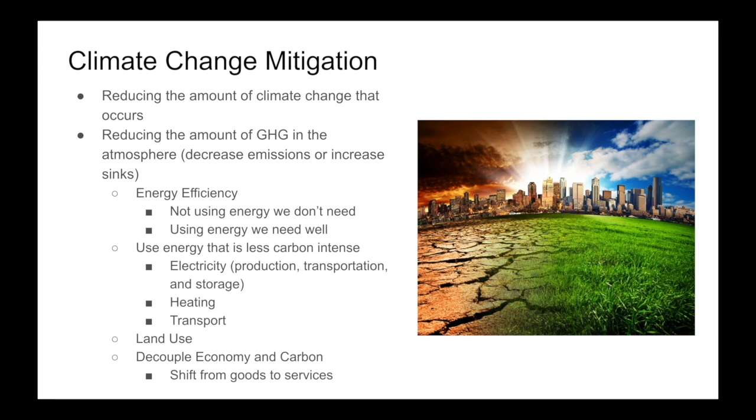We can break this down into a couple of different categories. We can look at strategies that increase energy efficiency, so not using energy we don't need, and using the energy we do need to use really well. We can also look at strategies that decarbonize energy production - electricity production, transportation, storage, how we heat our buildings, and how we move around. We can also look at land use strategies and other ideas for decoupling the economy and carbon.

Energy conservation is any behavior that results in the use of less energy. This is the turning off the light strategy. When I turn off the lights when I leave the room, less energy is used and therefore less carbon enters the atmosphere. The most efficient kilowatt hour is the kilowatt hour not used. So our most efficient energy that we can use is energy we don't use.

Drive your car less distance. Turn down the thermostat in winter, turn it up in summer. Some of these actions, such as changing your light bulb, do not have a big impact on day-to-day life. Others, like driving less or turning down the thermostat, do. People do not like being asked to do things that they perceive as reducing the quality of their life.

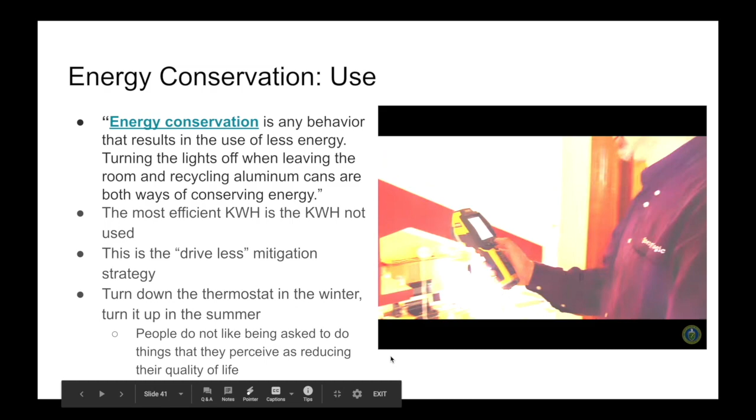In any season, a leaky home costs money. How do you stop it? It starts with a comprehensive home energy checkup - a series of tests and inspections to find out where your house could be more efficient. The end goal is to save energy, save money, and make your house more comfortable.

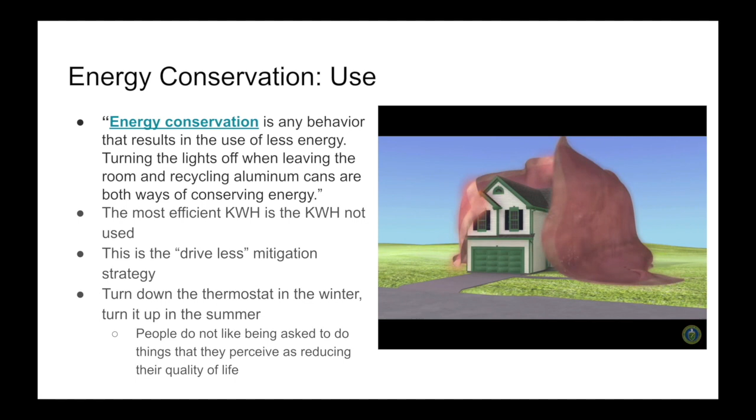Installing energy-efficient lighting and appliances will help. So will creating a sealed barrier around your house, kind of like putting a blanket around the outside, minimizing the leaks. Upgrading your home to save energy can put anywhere from 5 to 30% of your energy bill back in your pocket.

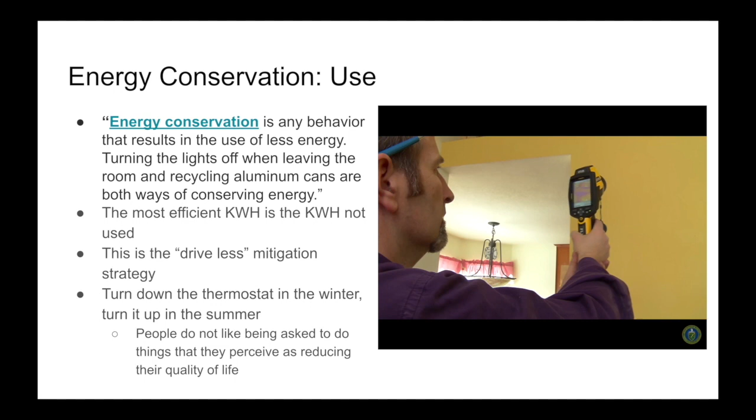To get a thorough home energy checkup, you'll need some help from a professional. Look for a home energy technician called an auditor in your area. In this cold weather evaluation, the auditor starts on the outside, looking for problems around walls, joints, and under the eaves. If there's not a tight fit, you're losing energy and money.

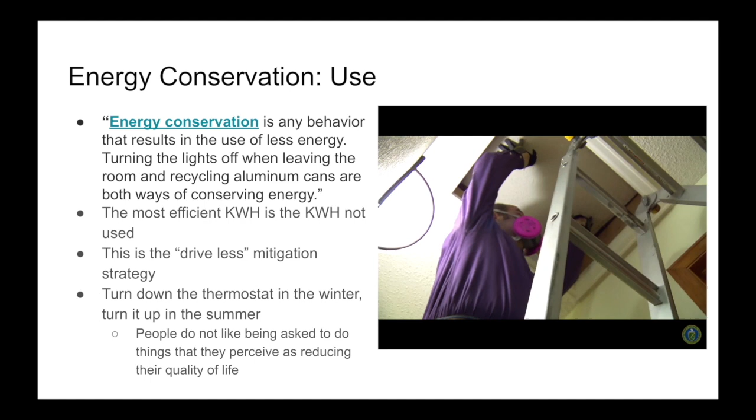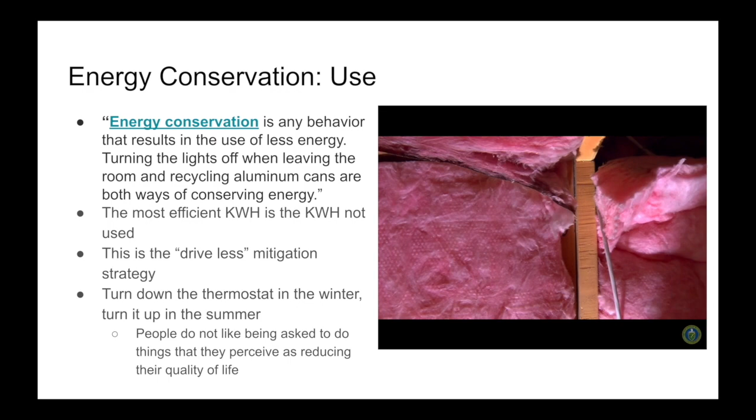Next, the technician might head up to your attic to check for leaks on the top of your home barrier. That trap door could be a culprit, letting cold air pass into the house. A big part of the checkup is determining how well the insulation insulates. Insulation should be correctly installed in between all areas of the house frame - it needs to be evenly applied and not just jammed into spaces. And of course, if the insulation has fallen down, it's not working.

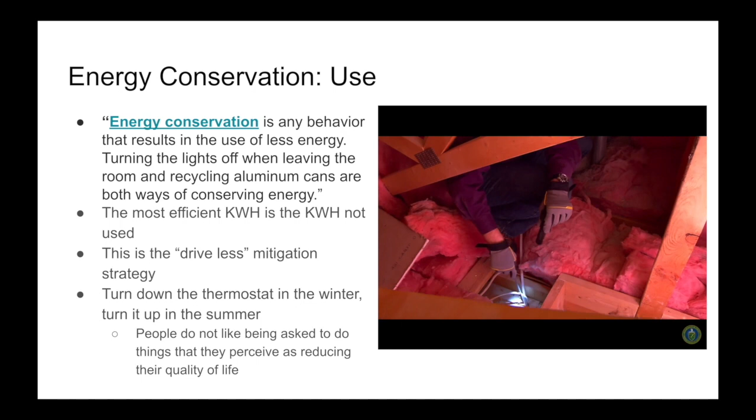Your energy auditor will inspect the holes where electrical lines pass through. If they're not sealed, they're leaking.

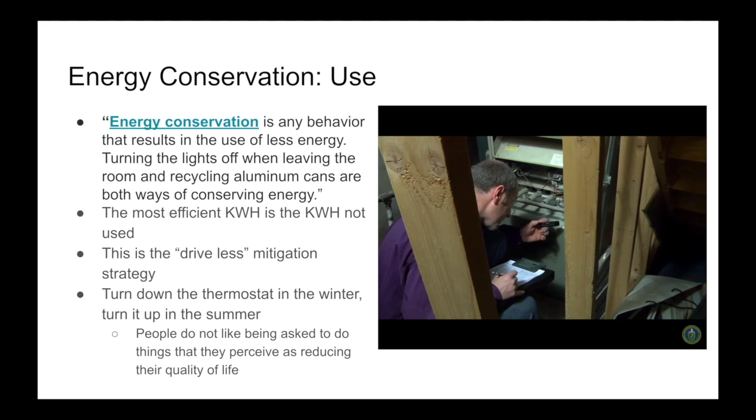Then it's down to the basement. Your furnace and water heater could be wasting energy. The auditor will check to see how energy efficient the furnace is. Furnaces generally lose efficiency as they get older, and it could cost you more to keep yours running than to replace it with a new one. Maybe all you need is a new filter - some people haven't changed their filter for months, even years.

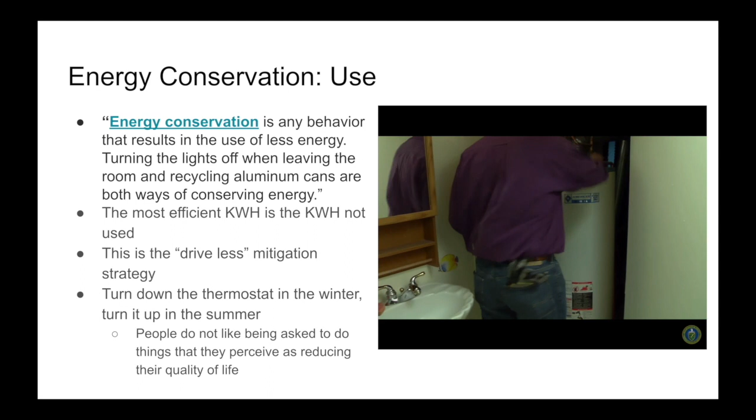That gunk clogging the filter means your furnace has to work harder to heat your home. If the water heater is several years old, it may not be efficient. And if it isn't insulated, it's also losing energy.

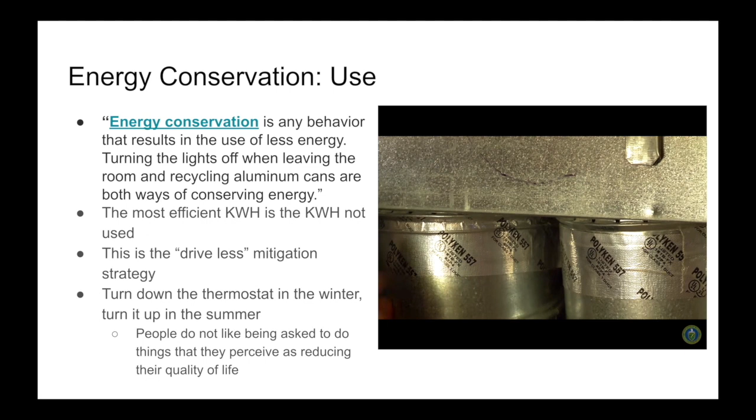Now it's on to the ductwork. The technician will inspect connections to make sure they make a tight fit. They have to be sealed to keep the warm air going where it's supposed to go. If the screwdriver can go in the hole, it means one thing for sure: money is going out.

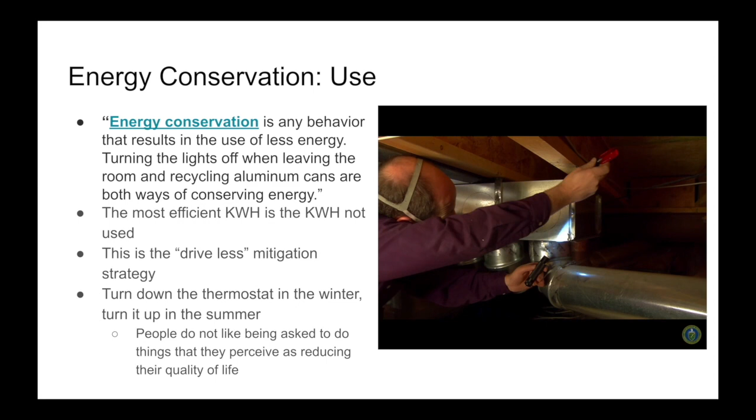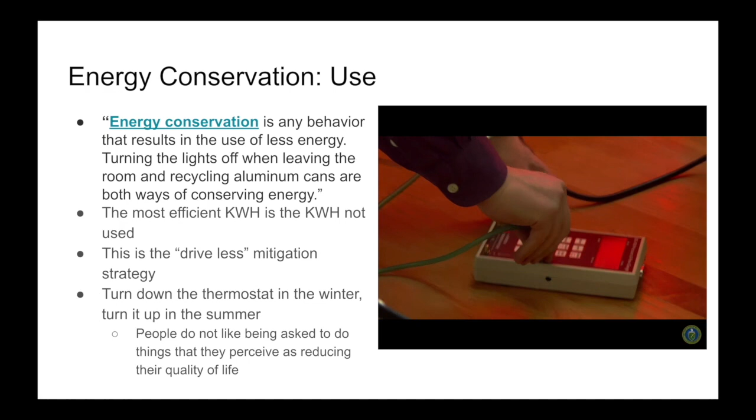Now for the blower door test. The energy auditor will close all the windows and doors and anything else that lets outside air in. This special fan will depressurize the home. The idea is to suck air out of the house, allowing outside air to rush into the home through all those openings you didn't know about.

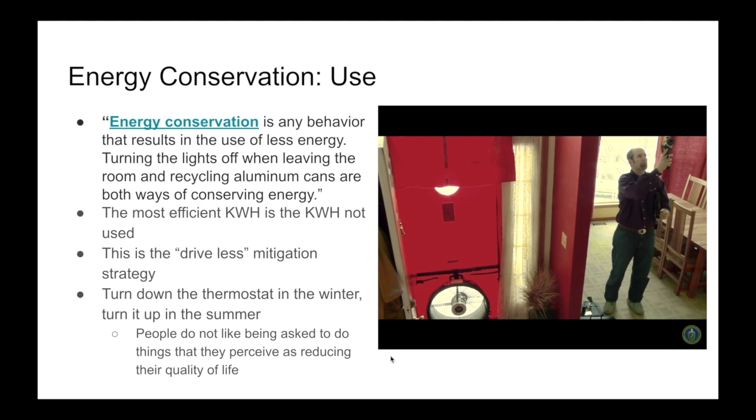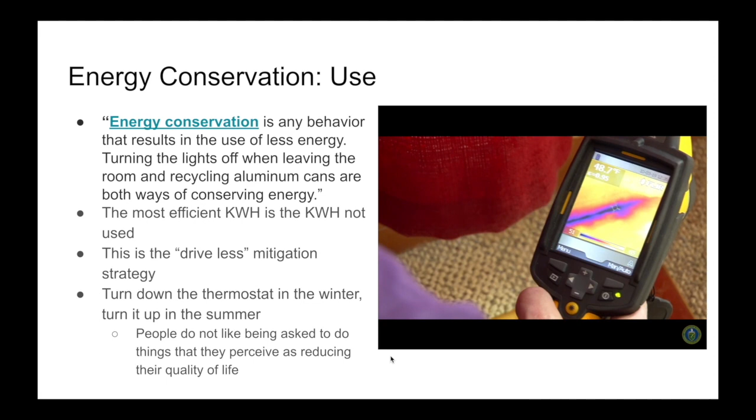With the windows and doors closed and the fan running, leaks are easy to spot with an infrared camera. In winter, the auditor will scan the interior of the home looking for cold air rushing in. The darker the color, the worse it is. These black spots mean one big air leak. It's an eye-opening experience. For this house, the recessed lighting fixtures are big problems.

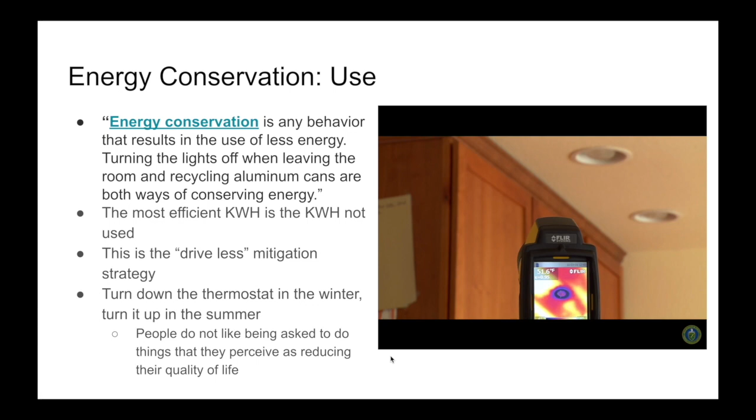The auditor will also take a look at the kinds of light bulbs in those fixtures. If they're incandescents, they're using a lot of energy. Warm, compact fluorescents are an energy-saving alternative.

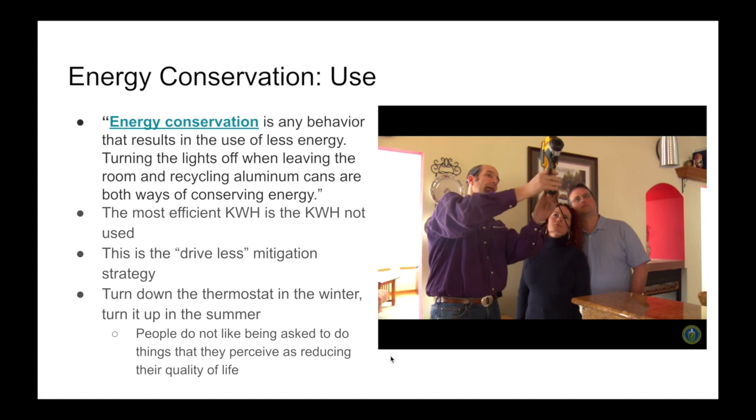So the home energy assessment reveals ways that energy escapes your home, costing you money. The good news is you'll have a comprehensive home energy report showing which efficiency upgrades are right for you and where to stop those pesky leaks.

So that's an example of a conservation strategy of using less energy that actually improves the quality of life. When you do not have cold air coming through your windows in the winter, you are more comfortable, you save money, and you use less carbon.

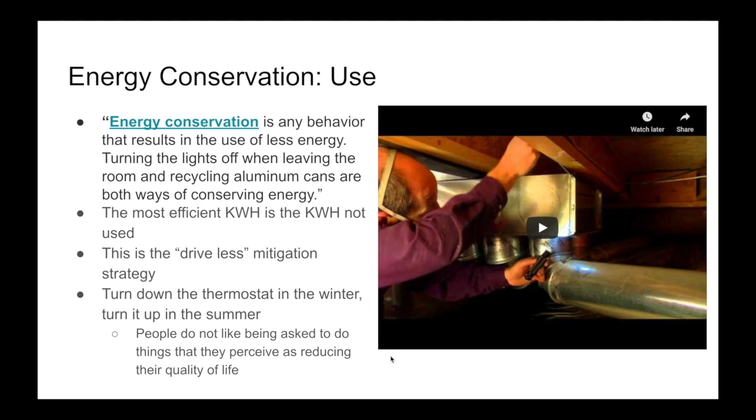In the 1970s, the United States had an energy crisis. We were unable to produce the energy that we needed, and OPEC was not supplying us with the oil that we were demanding. A number of steps were taken, one of which was President Carter instituting a thermostat control program. In the program, he stated that thermostats should not be set above 65 degrees in winter or below 78 degrees in the summer. This program saved 300,000 barrels of fuel daily.

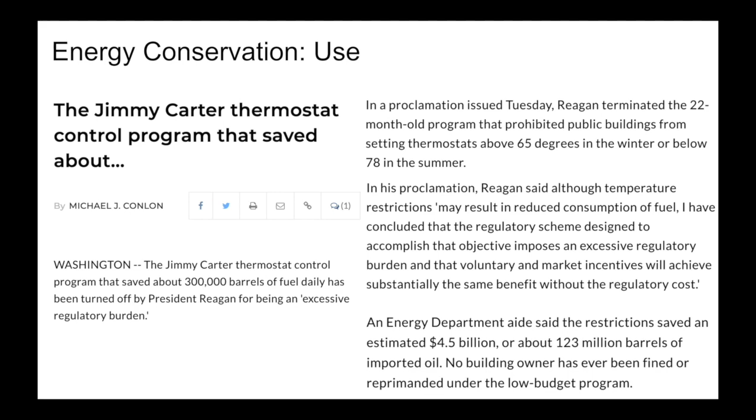However, President Reagan abolished the plan because it was an excessive regulatory burden that was deeply unpopular. In the winter, put on a sweater.

In the early 1970s, also in response to the energy crisis, President Nixon set highway speeds at 55 miles an hour across the country. Of course, speed limits are set at the state and local level. However, by tying federal highway funds to the plan, President Nixon was effectively able to set a national speed limit. The 55-mile-an-hour national speed limit was rescinded by President Clinton in the mid-1990s.

Again, a strategy that was put in place to save energy, albeit not for climate change, was abandoned because it was unpopular with the people.

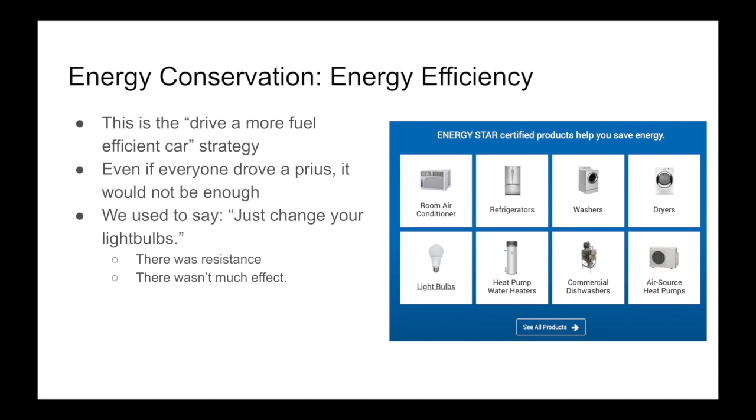While energy conservation is vitally important, it is not enough. Even if everyone drove a Prius, we would not be able to get our carbon emissions low enough. People used to say, just change your light bulbs, that'll fix the problem. And then there wasn't much of an effect. Very few people use incandescent light bulbs today. We have more efficient LED bulbs that better match natural sunlight, but even with that, we did not reduce our carbon emissions enough. Energy conservation alone is not going to do it.

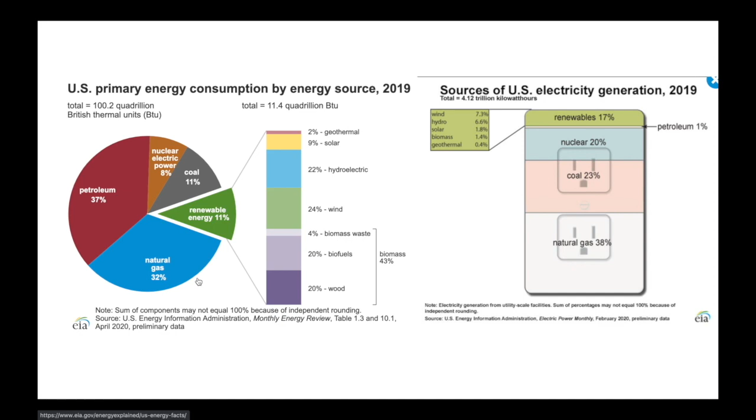I do for a minute want to talk about coal. The argument for using coal is we've used it in the past, and the infrastructure already exists. However, it is the dirtiest source of energy from a CO2 perspective, from a mercury perspective, and an aerosols perspective. It kills workers, and it kills people in the general population.

It contaminates drinking water, it destroys mountains through strip mining, and it's expensive both directly and indirectly through health costs. The big switch we've seen recently from coal to natural gas had a huge impact on the amount of CO2 we're putting into the atmosphere. It's also cleaner and cheaper. The downfall of coal is mostly the result of economic processes, not regulatory burden.

Natural gas, which we oftentimes talk about as being a bridge fuel because it is cleaner than coal, it produces less CO2 than coal. It is still a non-renewable resource, it is still a fossil fuel, it still emits, and it does have some problems such as causing earthquakes and groundwater contamination when mined through hydraulic fracturing.

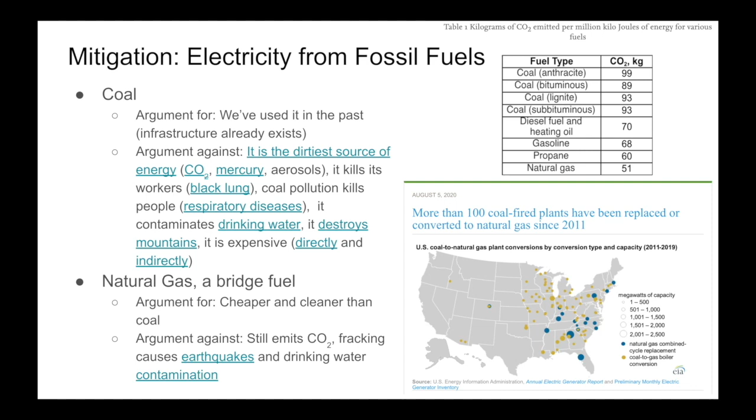The last non-renewable we are going to talk about is nuclear. Nuclear has a lot of arguments for it. It's a proven technology that produces baseload power without emitting carbon.

And when we talk about baseload power, what we're talking about is the amount of electricity that we are constantly going to use. So the amount of electricity needed fluctuates throughout the day, from peaks in the afternoon to lows in the middle of the night. And ramping up and ramping down electricity production is very difficult for some sources of power generation. Nuclear is very good at providing steady amounts of energy over long periods of time.

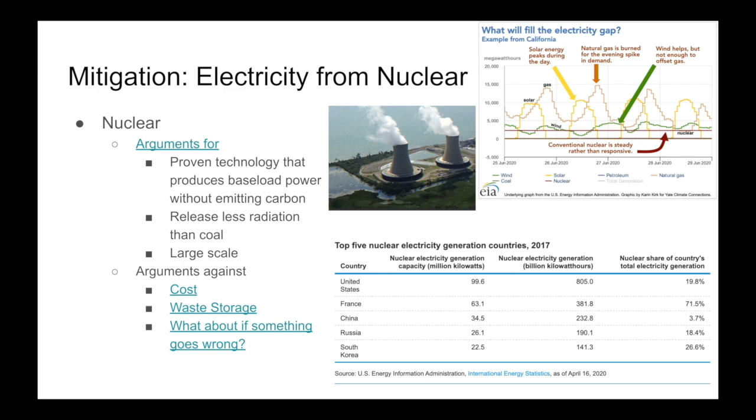Nuclear power has actually released less radiation than coal, and it can be done on a large scale. Nuclear energy does attract controversy because it's expensive, but mostly because of the concern about radiation. What are we going to do with the radioactive waste? What do we do if something goes wrong? What about Fukushima, Chernobyl, and 3 Mile Island?

And then we have the renewables. These are things like hydroelectric, wind, solar, and biomass. We're not going to talk too much about each one in depth, but I do want to point out the advantages and disadvantages of some of them. First, looking at hydroelectric, this has the largest share of renewable energy that we are producing in the United States, and one of the advantages is it's able to produce consistent carbon-free power.

The drawbacks of hydroelectric are impacts on wildlife, such as fish being unable to travel up rivers easily, even with fish ladders, dam failures, like we saw in Midland, Michigan in the spring of 2020, and the environmental impacts of constructing new hydroelectric dams.

With wind, we have the advantages of them being cheap to run. Wind cannot run out. You cannot outsource the jobs of installation and maintenance. And it provides incomes to farmers because it's able to be placed on land that is actively being used to farm. Drawbacks of it are that some people think that it's unsightly.

It kills birds, although not nearly as many as sources like coal does. And the wind does not always blow.

With solar power, we can gain that from either photovoltaic cells or concentrated solar thermal power, which is cheap to run, it can't run out. And for photovoltaics, it's easy to distribute the power production across the grid. The drawbacks are some people think they're unsightly. And of course, the sun does not always shine.

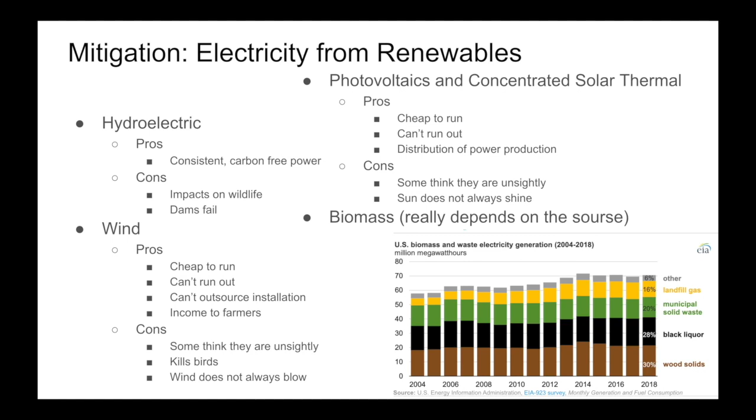Of course, some of these problems jump out at you. The wind does not always blow. The sun does not always shine in order to have net zero electricity production. And to do that, you need to have energy storage. I know that we're all familiar with lithium-ion batteries, but those are not the only way that we can store energy. The most common way that we store energy at a utility scale is pumped hydroelectric.

When you have pumped hydroelectric, when you produce extra electricity, so when the sun is shining or the wind is blowing, and you have extra electricity that's not being used, you take it and you pump water up from a low level to a high level. And then when you need that extra energy back out later, when the sun stops shining at night or when the wind stops blowing, you let that water that you pumped up flow back through the turbine.

These are actually very efficient systems, and they've been proven in use since the early 1900s. The only drawbacks are the environmental concerns associated with building new reservoirs and the fact that you need very specific geologic formations in order to do this. It would be very difficult to build one of these out in the Great Plains where wind production is the highest.

Used on a much smaller scale, for example, we only have one major compressed air plant in the United States. When you have extra electricity, you can use that to compress air into large underground storage. And then when you need that, you can let the air back out, and as the air is escaping, you can use it to power a turbine.

These are very flexible. They have very responsive production, so you can increase and decrease electricity production very easily. However, you do need to have some place to store this. You have to store large volumes of air under very high pressure. And if you have changes in pressure, that impacts the voltage you're able to produce.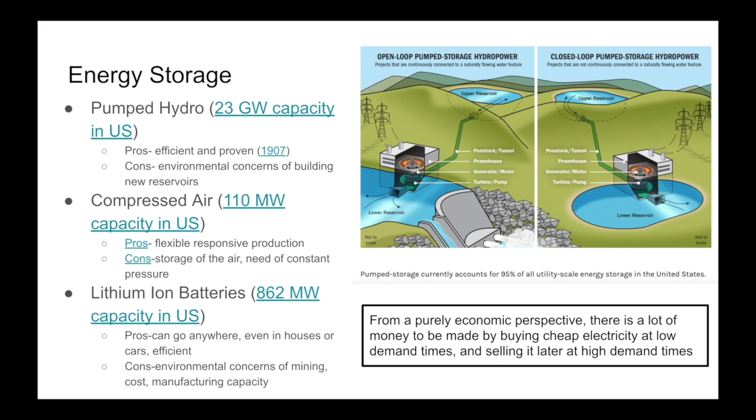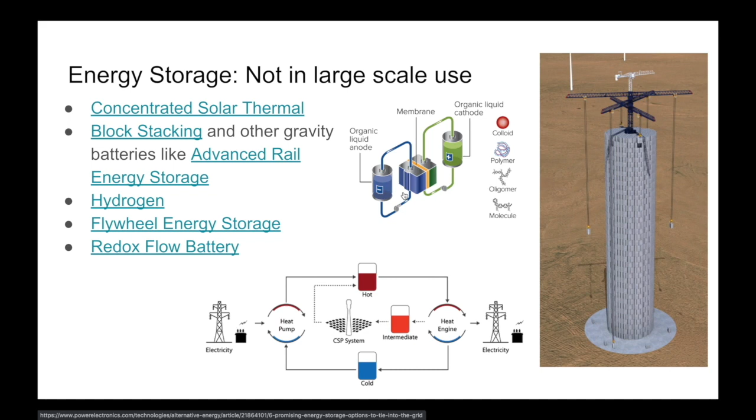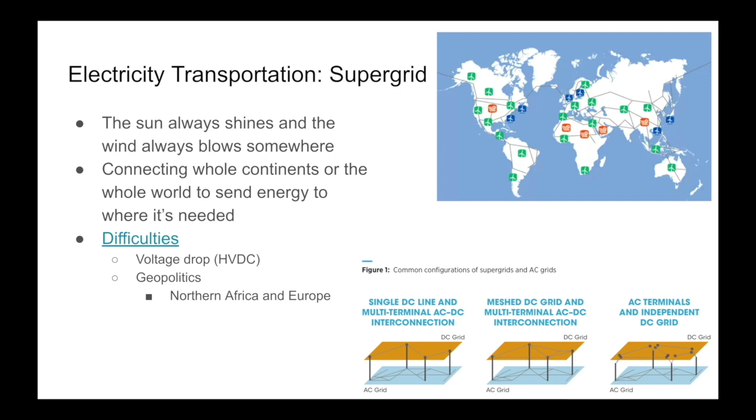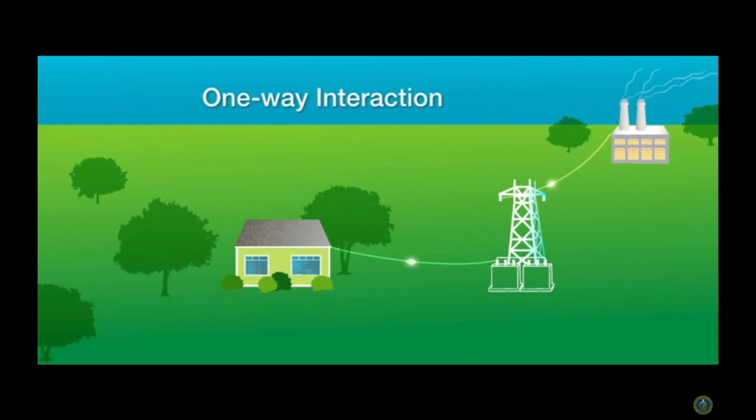Our current electric grid was conceived more than 100 years ago, when electricity needs were simple. Power generation was localized and built around communities. Most homes had only small energy demands, such as a few light bulbs and a radio. The grid was designed for utilities to deliver electricity to consumers' homes and bill them once a month. This limited one-way interaction makes it difficult for the grid to respond to the ever-changing and rising energy demands of the 21st century. The smart grid introduces a two-way dialogue where electricity and information can be exchanged between the utility and its customers.

It's a developing network of communications, controls, computers, automation, and new technologies and tools working together to make the grid more efficient, more reliable, more secure, and greener. The smart grid enables newer technologies to be integrated, such as wind and solar energy production and plug-in electric vehicle charging. With our participation as informed consumers, the smart grid will replace the aging infrastructure of today's grid, and utilities can better communicate with us to help manage our electricity needs.

The smart home communicates with the grid and enables consumers to manage their electricity usage. By measuring a home's electricity consumption more frequently through a smart meter, utilities can provide customers with much better information to manage their electricity bills. Inside the smart home, a home area network, or HAN, connects smart appliances, thermostats, and other electric devices to an energy management system. Smart appliances and devices will adjust their run schedule to reduce electricity demand on the grid at critical times and lower consumers' energy bills. These smart devices can be controlled and scheduled over the web or even a TV.

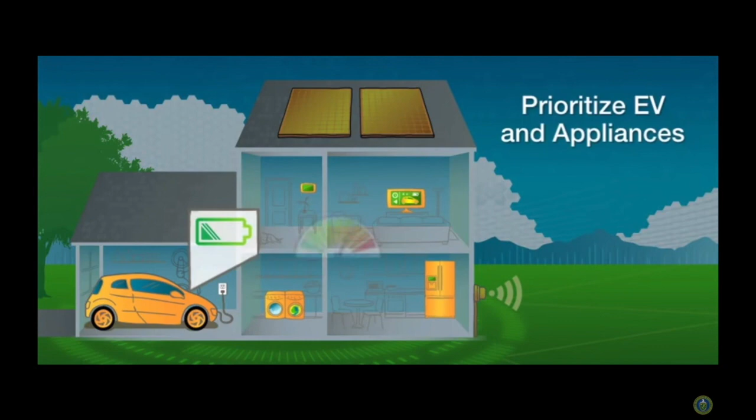The HAN can balance the demand for electricity across the household and prioritize between the electric vehicle and other appliances to manage electricity usage and reduce costs.

With smart grid technologies and consumer participation, utilities can more easily handle the increased demand for power to run electric vehicles and ensure charging needs are met. By adding more plug-in electric vehicles to the grid, we have the potential to reduce fuel costs, lower our dependency on foreign oil, and help reduce greenhouse gas emissions.

Depending on who your electricity provider is, you can actually get a smart meter right now where they will charge you different rates depending on what time of day you're using electricity. If you charge your electric car at night, or run your energy-intensive appliances at night, you both save money as well as make the grid more efficient.

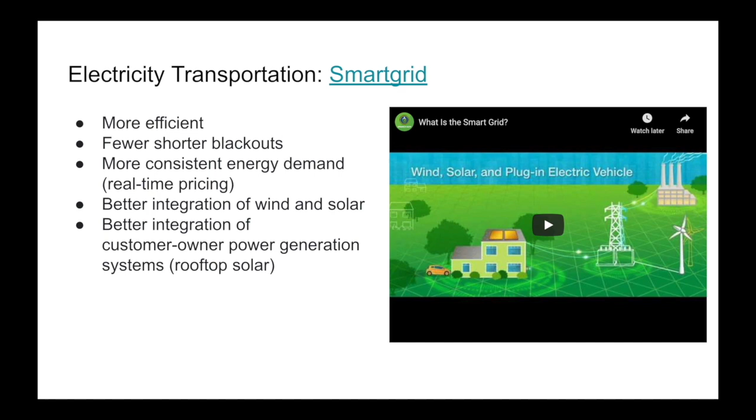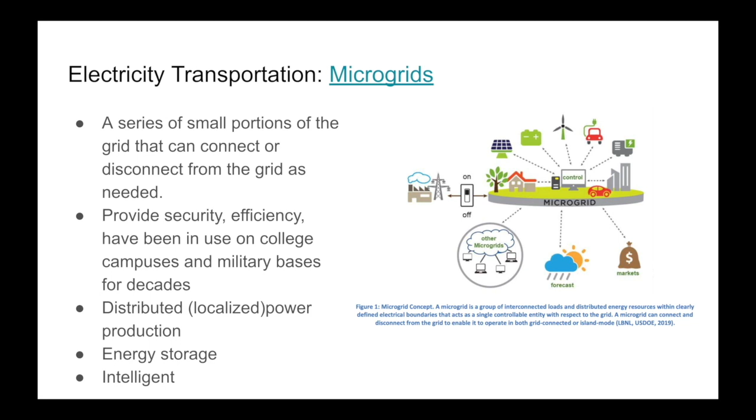Reworking our aging electric grid will require significant investment. However, that will most definitely pay off in short order.

So today we've taken our first look at some of the climate mitigation strategies, but there is so much more. Next time we come together, we're going to look at climate mitigation part 2, and we're going to learn about transportation and land use changes.